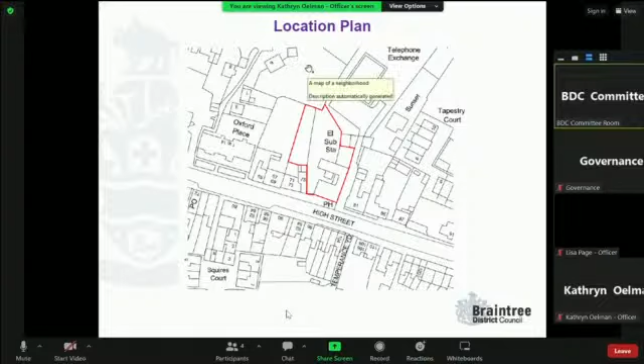In terms of constraints, the property is Grade 2 listed and within the conservation area. There are a number of trees on the estate behind which are subject to tree preservation orders, though none of those trees lie on the boundaries of the site, as you'll see later. The development boundary of the village is marked by the black line here, and the purple dotted line refers to the designation of local centre within the local plan. It's also within the Habitats Regulation Assessment Zone of Influence.

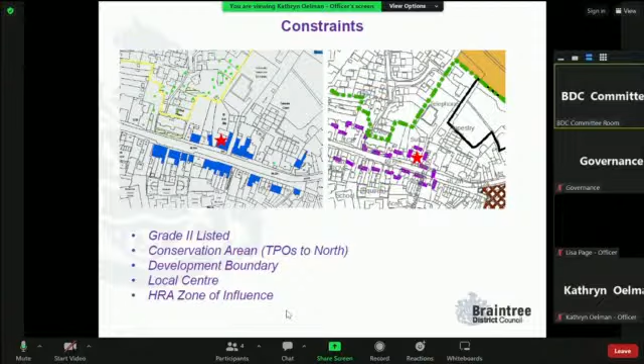Looking at the aerial photograph here, this is the castle. You can see there's a car park behind and a grassed area, with trees in this location and the high street to the south.

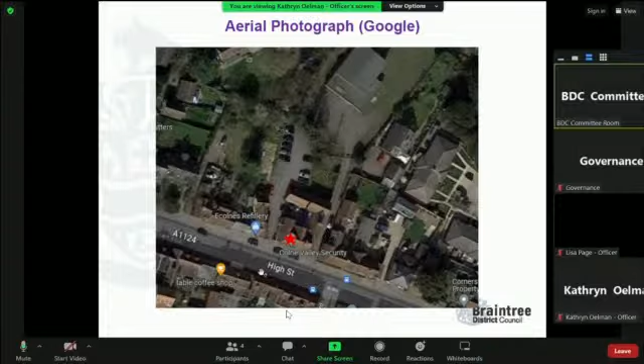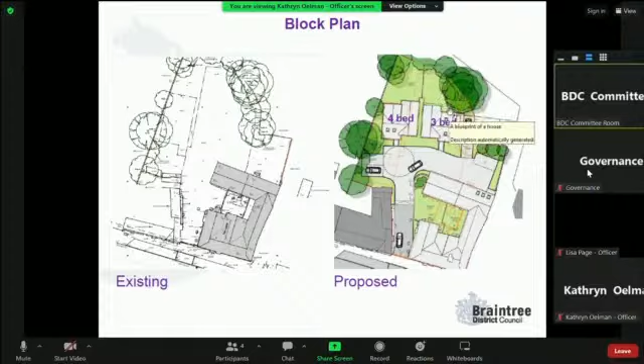This plan shows that all the trees overhanging the site would be crown lifted or crown reduced to prevent them overhanging. Some of those trees lie in neighbours' gardens, some lie on the site itself. There's an area in Group 2 where hand-dig construction of the parking area would be needed, and similarly hand-dig construction for these trees, in order to remove the existing hard standing which lies in that area.

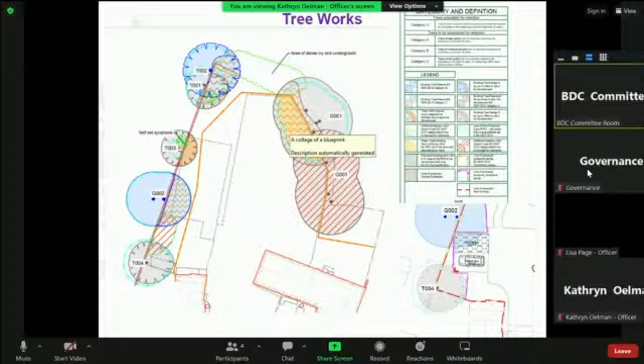In terms of the plans themselves, this is the ground floor plan. You'll see that a unit would be created here facing onto the high street. Another unit is proposed in this section on the eastern element. And then a unit would be created above the outbuildings.

The outbuildings are arranged at the moment, but part of them would be demolished and rebuilt in this area, in order to facilitate the car parking areas being provided.

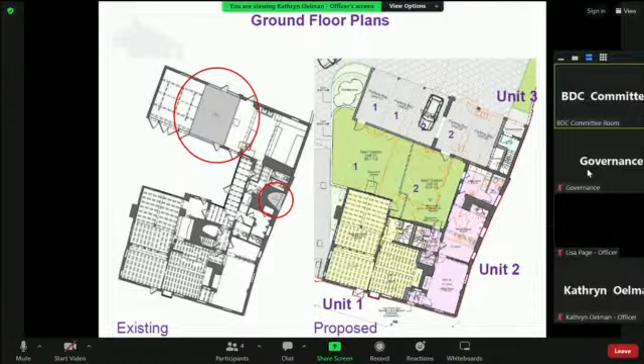At the first floor, there's a large area in the range of outbuildings and the first floor of the pub itself which hasn't been surveyed, so we don't have any information about it. You'll note there are some roof lights proposed in this roof here, and no information about the fabric that would be removed there.

Similarly, there are some windows proposed. On the western flank of the building, it's proposed to uncover an existing window. We don't have any information about the fabric within it or its historic significance, so it's not possible to ascertain whether that would be acceptable or not.

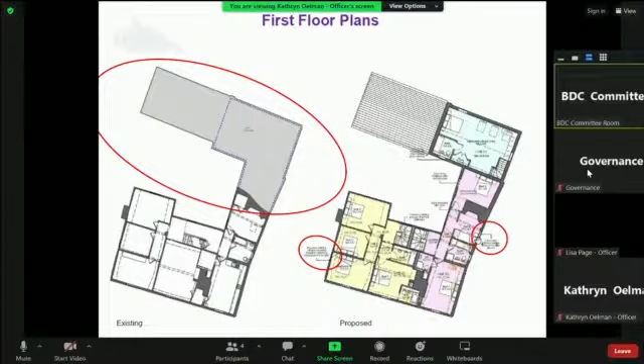Similarly, on the eastern side here, there's also a window proposed to be inserted. Again, very little information about the fabric that would be removed, precisely where it would go, and whether it's absolutely necessary to do that - whether you could achieve a different floor layout, for example, and not have to create that opening and lose that fabric.

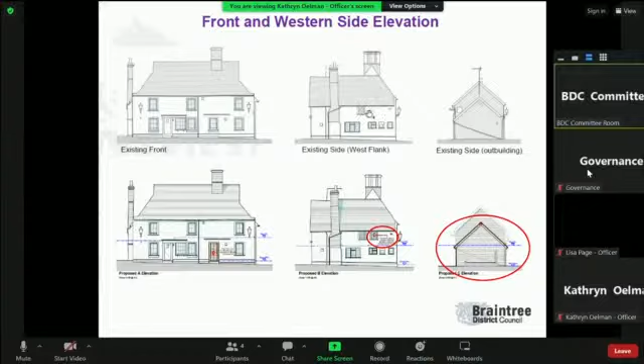I'm just showing you the frontage there, so that you can remember what it looks like, and similarly here - that's the portion of the outbuilding that would be demolished.

If we travel to the rear of the site and look directly at those outbuildings, looking south, you can see the works proposed here. In terms of the works proposed, there are some considerable concerns over the design - detailing, the general approach to the carriage arches here, and overall whether it's necessary, and what the impact really is of the roof lights and the demolishing of that portion of the outbuilding.

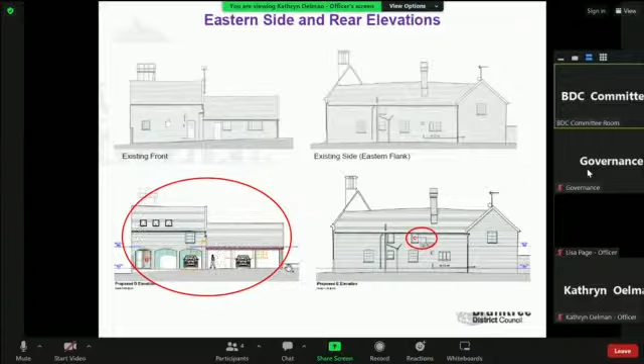The eastern side, this is that view that I was referring to currently. This is the internal courtyard.

One beneficial element of the submission is the removal of some modern elements in the internal courtyard area. There's a glazed link currently there which would be removed, and a porch which should also be removed. There would be some alterations to the fenestration, creating longer windows which overlook the gardens below.

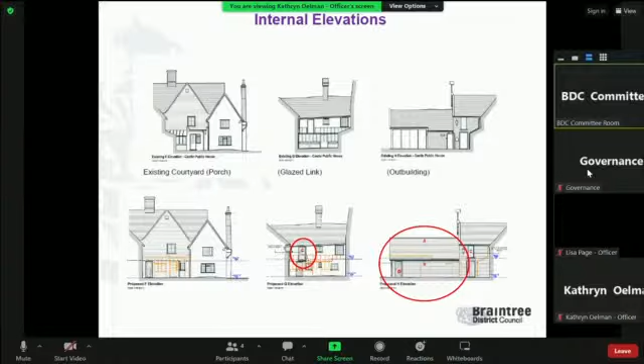So that's that porch being removed, and the glazed link also to be removed. You get an impression here of the size of the courtyard area, which would form two gardens as proposed.

And the dwellings as proposed to the rear are proposed to be constructed of traditional materials with red brick and timber boarding above, clay plain tile roofs, and painted timber doors and windows.

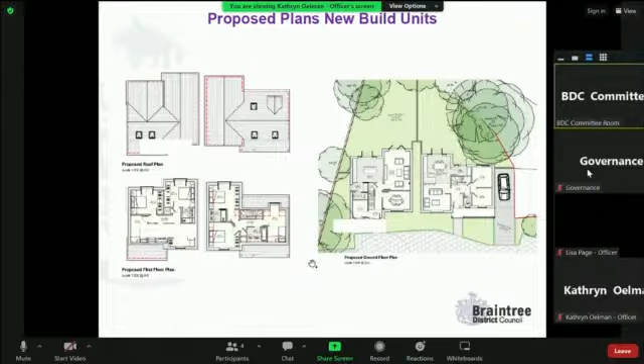However, the form of the dwellings is overwhelmingly suburban in our consideration, and generic in appearance essentially. Doesn't, in our view, reflect the historic surroundings or enhance local distinctiveness.

They have a sort of chalet style which is quite contrived and overcomplicated. The timber half boarding is not particularly reflective of the area. Their busy roof form, the scale of the side wings, is a concern, as is the large openings being created.

In the rear elevation here, modern fenestration pattern not reflective of the area, lack of chimneys not reflective. Generally incongruous in our view. Bland and lacking in aesthetic detail.

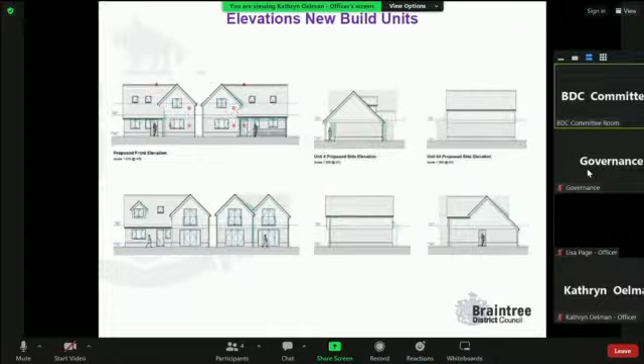So, obviously, there are a lot of facets to this application. I can't go through all of them in my presentation. So if you do have any questions, please ask, and we can go back to some of the slides and explain.

But the recommendation for the planning permission is for refusal on the basis of insufficient evidence for the loss of the pub use, the harm to the listed building in the conservation area, coupled with insufficient information on heritage impact and general poor design, which leads to concerns over amenity, refuse arrangements, parking, etc. Generally, overdevelopment of the site, I think, and thus contrary to the development plan and the NPPF as a whole.

And in terms of the listed building consent, this obviously doesn't cover the dwellings, so it only considers the conversion, harm to the listed building in the conservation area, and insufficient information on heritage impact.

There is a slight correction in terms of the reason for refusal, as a word was missed out. It should read: furthermore, there is a lack of survey information describing the significance of the local heritage asset and the impact of the works upon it. As a consequence, the local planning authority is unable to determine if the full impact of the works proposed, including the openings in the flanks of the listed buildings, works to the openings, works to the outbuildings, and works to the eastern wing of the listed building, particularly in the vicinity of the chimney stack, are acceptable.

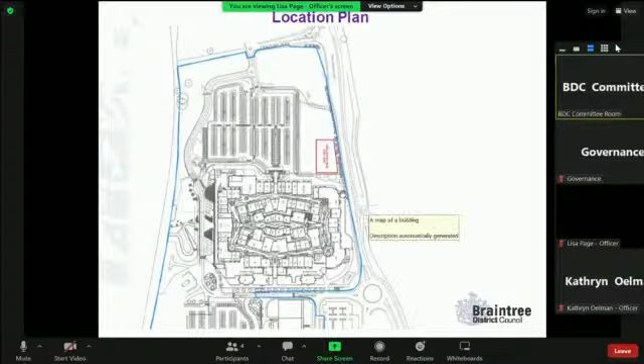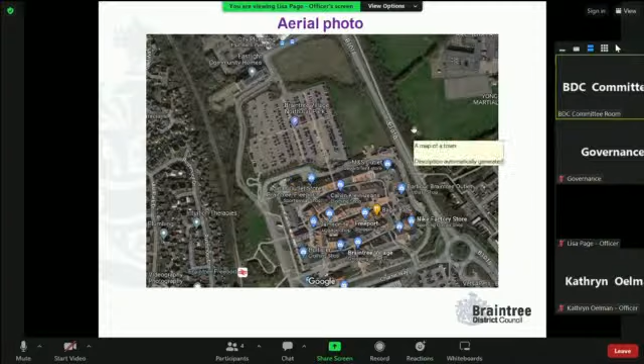Pedestrian access to the marquee ice rink would be from the western elevation, and there's an existing gap in the hedge due to be widened to allow pedestrian access. The application has been submitted with a pedestrian safety plan setting out how pedestrian movements to and from the site would be managed. This is detailed in the committee report, but consists of cordoning off 12 existing car parking spaces and erecting crowd barriers, which would also extend in front of the service yard area and be manned by security and car park staff whilst the ice rink is operational.

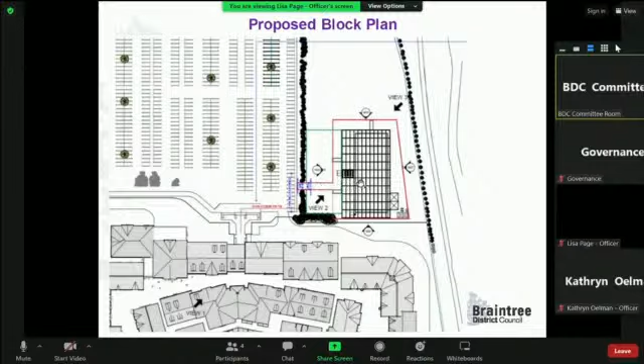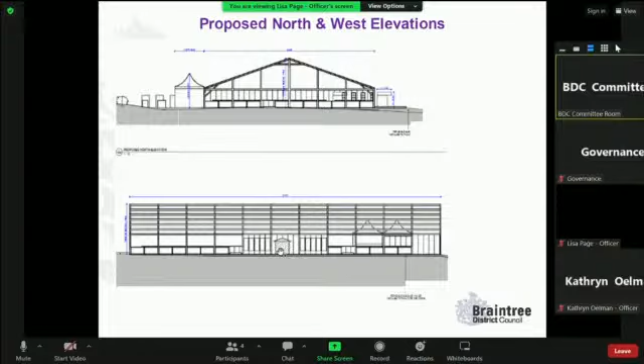Some other elevations here, so just to the bottom of the slide shows the scale of the built form and how it relates to existing buildings on Braintree Village.

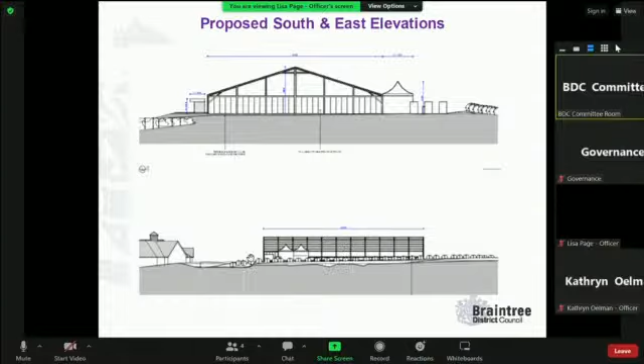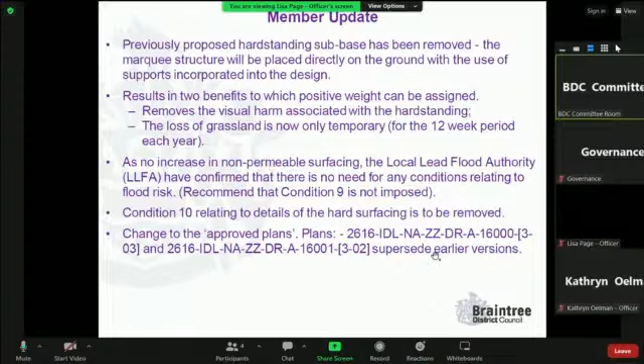In terms of a summary, the site does lie within the defined town boundary where the principle of development is acceptable. The use would complement the existing uses at Braintree Village. The development would create wider benefits to the district in terms of the local economy. The layout and design is considered acceptable and will relate well to the adjacent Braintree Village complex. There'll be no harm to the wider character and appearance of the locality.

The proposed lighting would be seen within the context of existing lighting in the car park and on the B1018. Compensation is proposed for the removal of the hedgerow, which is required to facilitate the pedestrian access. In addition, adjacent land would be planted with a wildflower grassland mix, and this would create secured biodiversity net gain.

Highway matters are considered acceptable, and the existing car park would acceptably serve the development. Many of the trips are considered to be linked visits with the wider Braintree Village. Pedestrian access is via the car park and the northern access, and an appropriate pedestrian safety plan has been provided which sets out how pedestrian movements will be managed.

The development would create no harm to neighbouring amenity, and matters in regards to flood risk and drainage are considered acceptable, and therefore our recommendation to you this evening, members, is that planning permission be granted subject to conditions. Thank you.